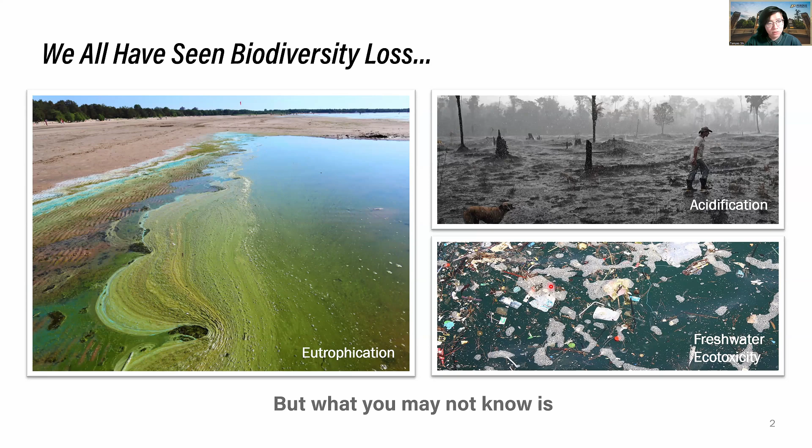Today, I'm going to talk about our most recent research on computing's biodiversity impact. So, first of all, we all have seen more or less the biodiversity loss, like these scary photos show the water bloom, acid rain, and loss of forest and aquatic trash. But what we may not know is that computing can actually be part of the reason for biodiversity loss.

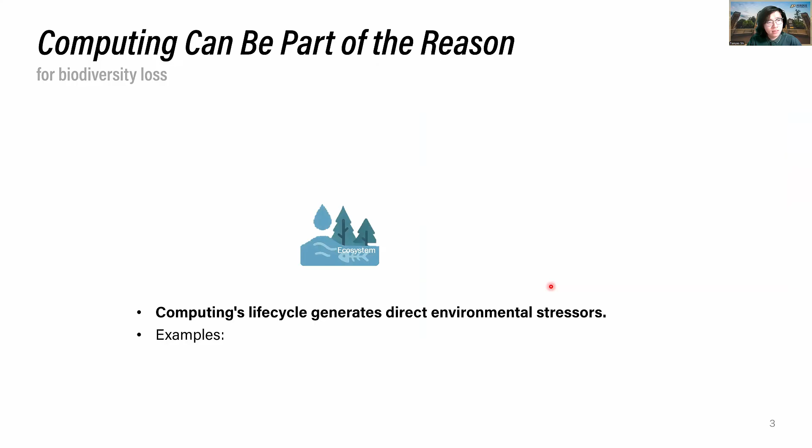Computing's life cycle actually generates direct environmental stressors in a lot of ways. For example, this is the ecosystem, and chip fabrication releases air and water pollutants, including acid gas and heavy metal ions.

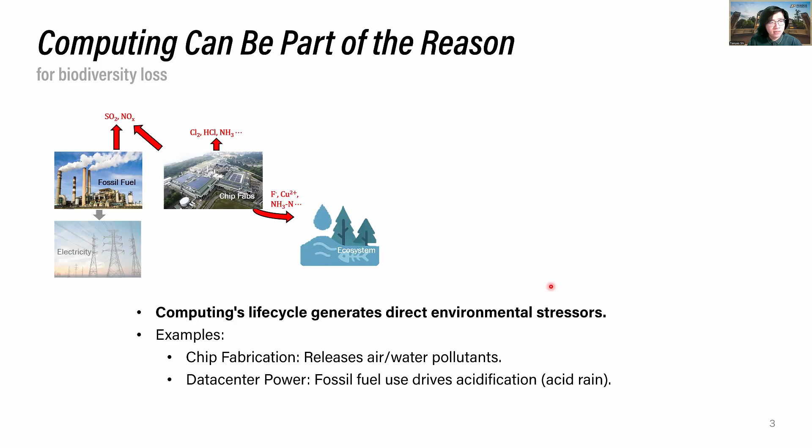Another path is the data center power, which uses fossil fuel generated electricity, and this indirectly drives the acidification process. Last but not least, when the electronic waste reaches its end of life, it goes into the leachate pond and leaches heavy metals into the ecosystem.

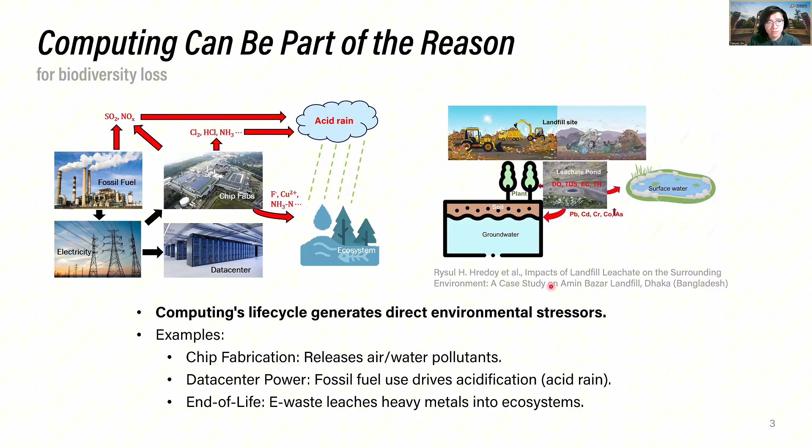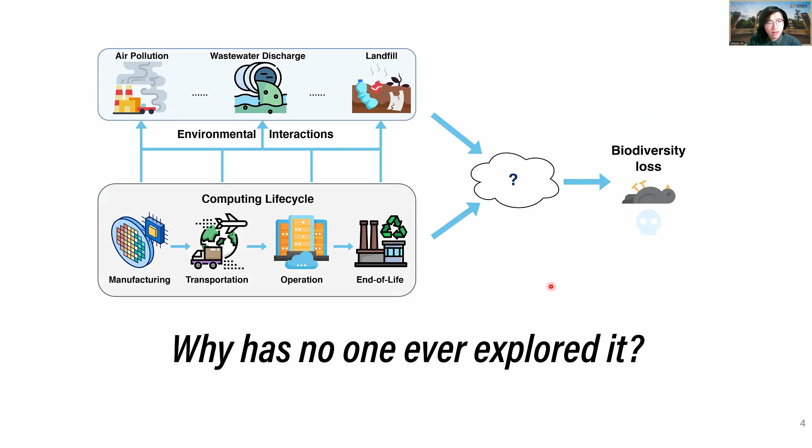So since computing has so much to do with biodiversity loss, and biodiversity loss is such a severe problem, why has no one explored it? The answer is that there exist two major research barriers. The first is the metric barrier, which means there is no quantifiable way to attribute the biodiversity loss to specific computing activities. The second is the modeling barrier, which means there is no modeling framework to connect the workload and system to a concrete impact number across the life cycle.

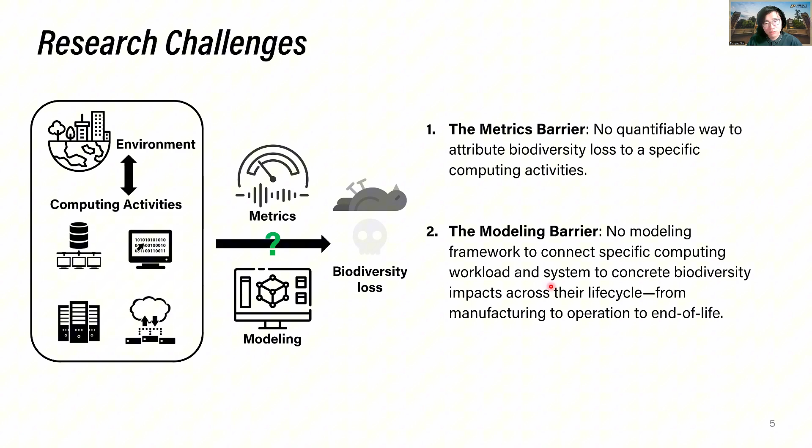To address these challenges, we conduct the first analysis of biodiversity impact in computing. In response to the metric barrier, we introduced two new metrics, EBI and OBI, to quantify the impact. In response to the modeling barrier, we present FABRIC, the first modeling framework that connects the life cycle impact to computing workloads. Finally, we use these tools to evaluate the impact across different devices, systems, workloads, and geographic deployment.

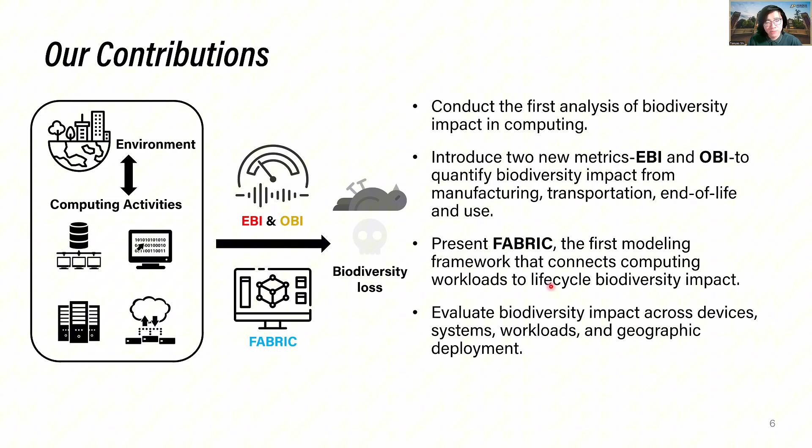This includes the acidification process, which means how much emitted gases can lower the environmental pH, and the eutrophication process, which means how excess nitrogen and phosphorus can enrich the ecosystems, and freshwater ecotoxicity, which quantifies the toxic impact of chemicals released into the freshwater ecosystems.

We select these three midpoints because sustainability reports from key vendors like TSMC and SK Hynix disclose the necessary emission data that directly map into these impacts. And to aggregate and unify these midpoint impacts, we use the ReCiPe 2016 model to convert midpoint impact into a single unified biodiversity metric expressed in species-year, which quantifies the expected fraction of species locally lost per year due to the cumulative environmental stressors.

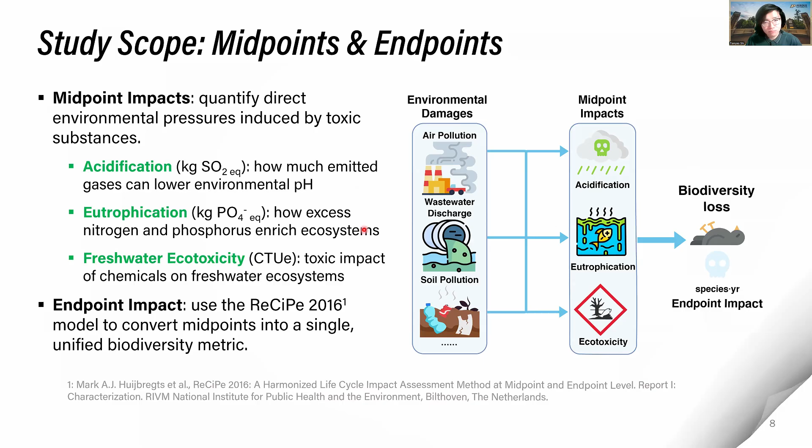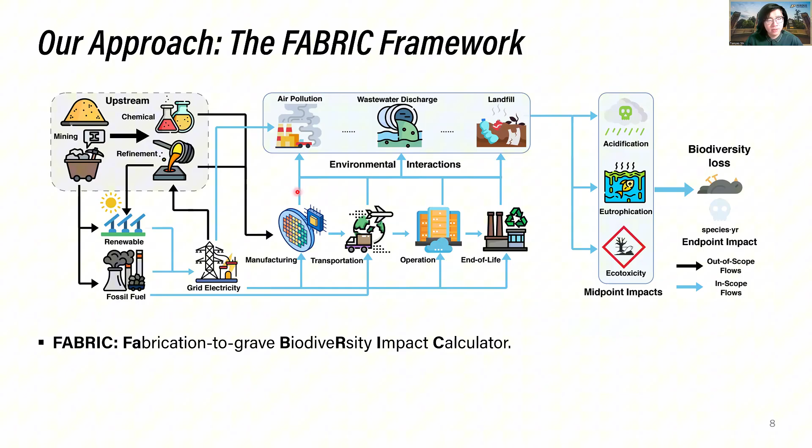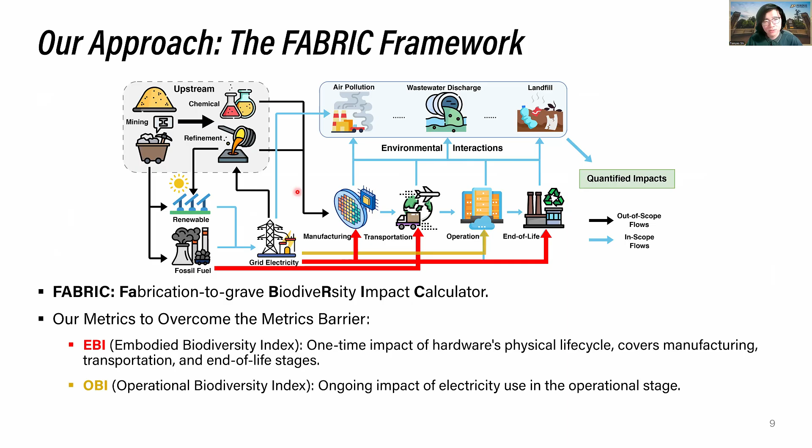So EBI is embodied biodiversity index, which quantifies the one-time impact of hardware's physical life cycle and covers manufacturing, transportation, and end-of-life stages. As for OBI, it is operational biodiversity index and it focuses on the ongoing impact of electricity use in the operational stage. Now, let's take a closer look into these two new metrics.

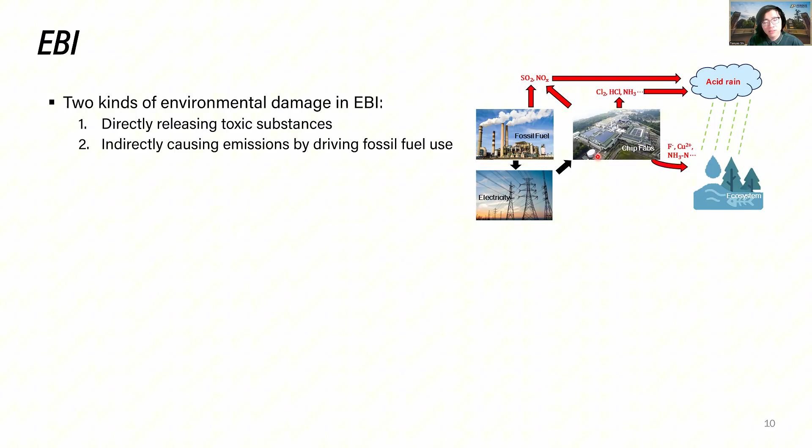So in EBI, we identify two kinds of different related environmental damage. The first is directly releasing toxic substances into the environment, like the chip fab releases acid gas and heavy metal ions. The second is indirectly causing emissions by driving fossil fuel use, which is the bottom part in this figure. The EBI of this device is calculated by summing all these impacts across different life cycle stages and impact categories.

And just like embodied carbon, the EBI of a specific workload is proportional to the execution time of this workload, amortized over the device lifetime and all the devices involved in this workload.

For example, take a look at a CPU. TSMC reports 39.5 tons of SO2 emission in 2021, and this translates into this much SO2 per production unit or per wafer mask layer. And this, in turn, based on the die size, the technology node, and yield of a specific CPU, translates into this amount of SO2 per EPYC 7743 produced.

And this is equivalent to this amount of acidification potential, and it does not incur any eutrophication or freshwater ecotoxicity impact. And using the midpoint to endpoint conversion framework, this corresponds to this amount of species-year loss. Although this may look minimal, when we repeat the process for other substances and aggregate the impact of all the CPUs made each year, or all the components in the system, this can actually be a non-negligible number. And more details can be found in the paper.

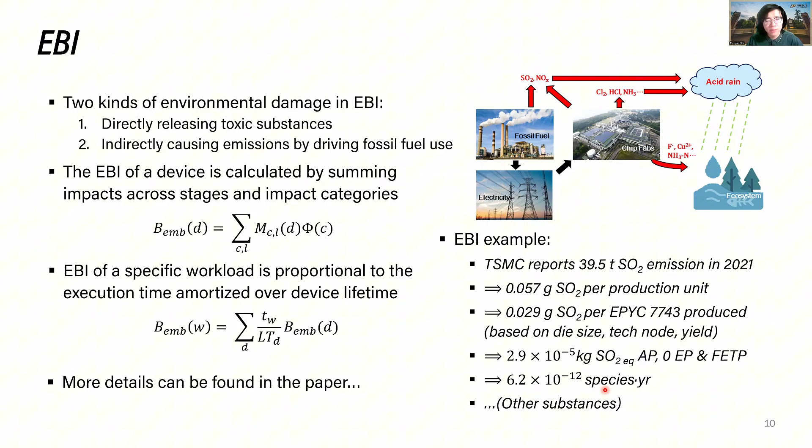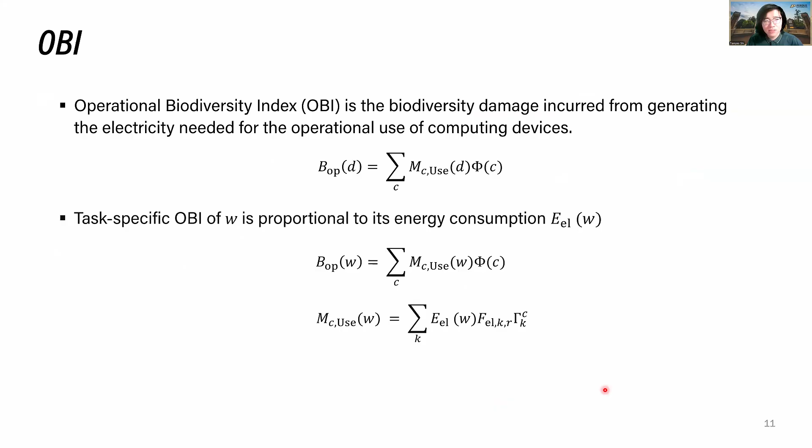As for OBI, it is rather simple. It counts the biodiversity damage incurred from generating the electricity needed for the operational use of computing devices. And just like operational carbon, the task-specific OBI of a workload is proportional to its energy consumption. And it also depends on the regional grid emission factor. That is, where it is deployed also matters.

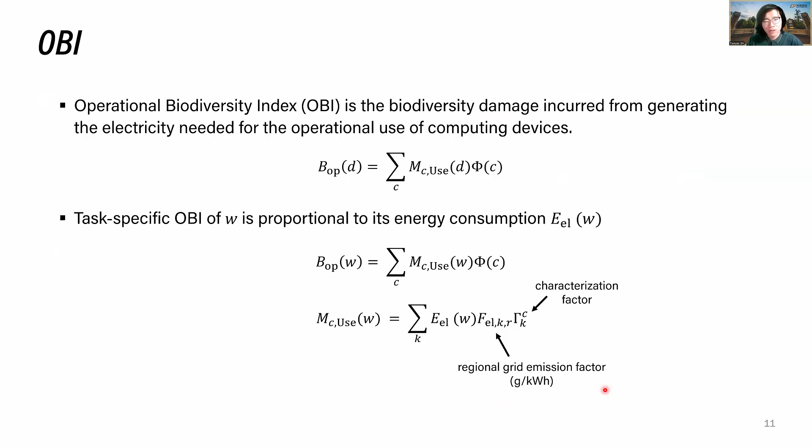So using these tools, we evaluate across different devices, systems, and workloads. We quantify the impact of 4 different CPUs, 5 different GPUs, and 3 types of different storage and memory devices.

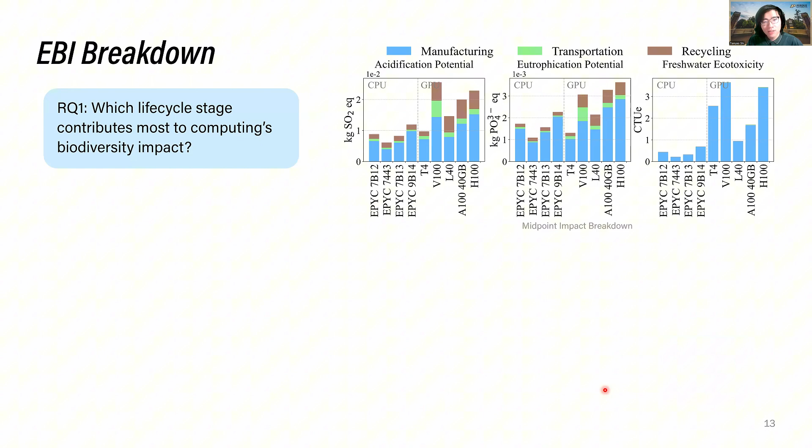So the first question is: which life cycle stage contributes most to computing's biodiversity impact? We first analyze the impact breakdown into different life cycle stages and different impact categories. So the upper figure is the midpoint impact breakdown, where the x-axis is different devices arranged by their time coming into the market, and the y-axis is the impact scale.

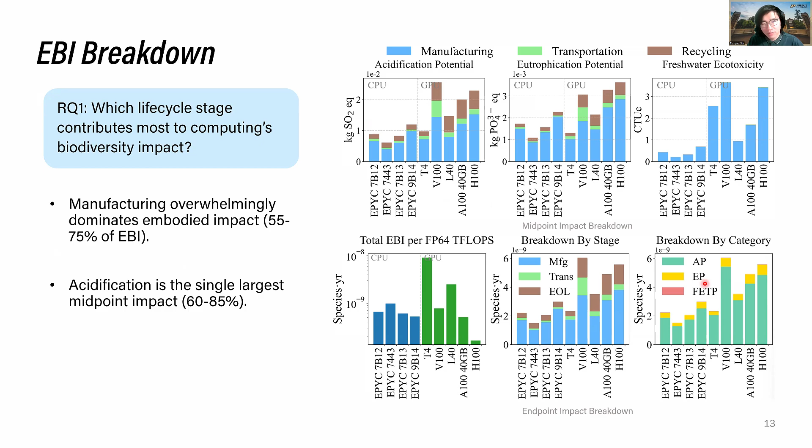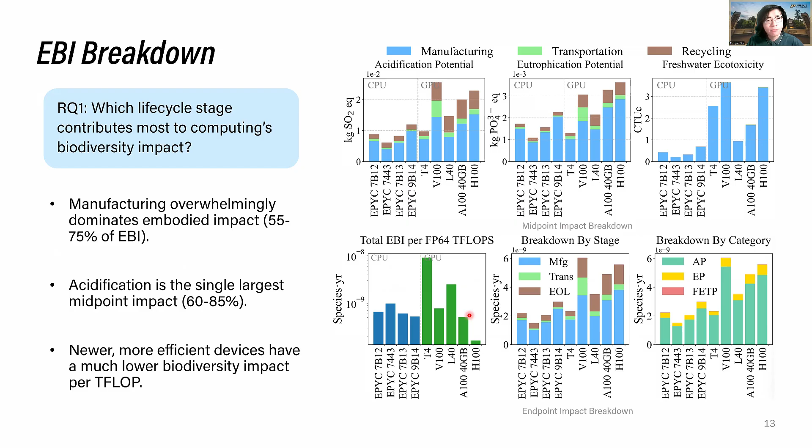So in these figures, the key information is, first, the manufacturing overwhelmingly dominates the embodied impact. Second, acidification is the single largest midpoint impact when we look by category. Last, although the absolute impact of these devices increases over time, when looking at a per TFLOP impact, the newer, more efficient devices have a much lower biodiversity impact on a performance basis. That was for the individual devices.

So the takeaway is when we are using conservative estimation, Fab-to-Grave in our study scope, and the US grid average emission factor, the operational electricity dominates the life cycle biodiversity impact. That was for the individual devices' impact per year. And when we look at the system level, it is roughly the same story. Take Perlmutter as the example.

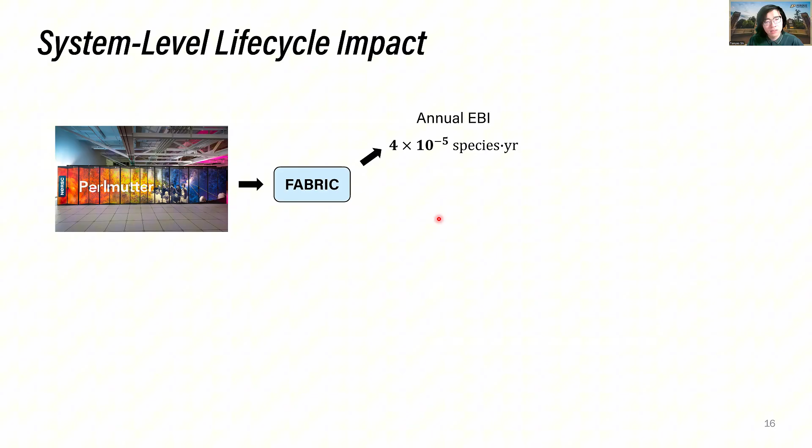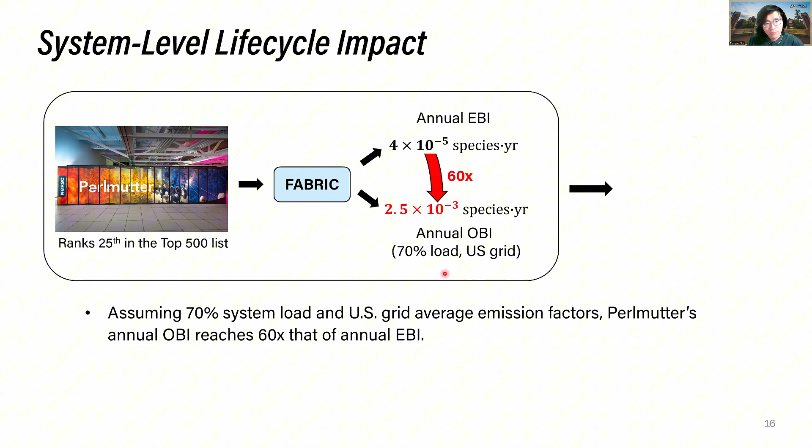From the previous calculation, we already know the annualized EBI of Perlmutter is roughly about this amount. And still, when we assume 70% load and US grid average emission factors, Perlmutter's annual OBI reaches almost 60 times that of annual EBI. And Perlmutter ranks 25th in the Top500 supercomputer list. If 400 Perlmutter-class systems are active globally, the total biodiversity impact is almost greater than one species a year, and this is non-negligible.

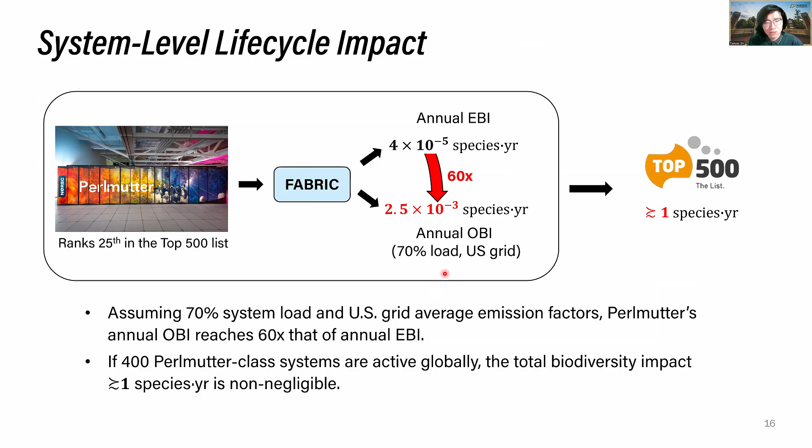For the last question, how does the deployment location affect computing's biodiversity impacts? We pick 4 different regions: the Midwest region in the United States, the California grid, Taiwan, and Quebec. They have very different regional energy mixes, where the Midwest and Taiwan are fossil fuel heavy, Quebec is hydro driven, and California also has a lot of renewables, including hydro and solar. And they also have different carbon and SO2 and NOx emission factors. And this in turn drives why they have very different biodiversity impact if we deploy Perlmutter in these different regions.

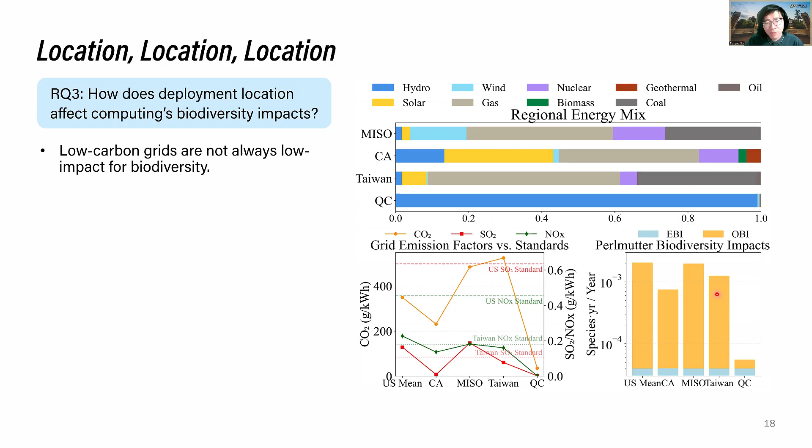So the conclusion is that low carbon grids like US grid average and MISO, although they have lower carbon emission factors than Taiwan, actually have higher biodiversity impact because the SO2 and NOx emission factors are higher in these two regions. And a hydro-based grid like Quebec can actually cut the operational impact by 2 orders of magnitude, to even smaller than the EBI, which highlights the necessity of investing in renewables.

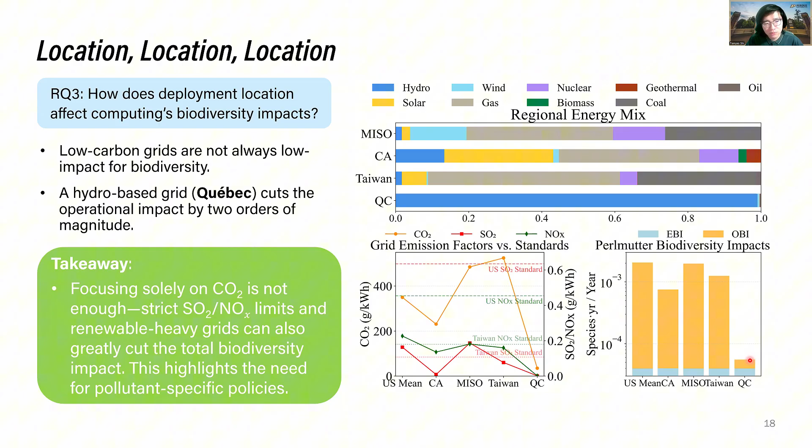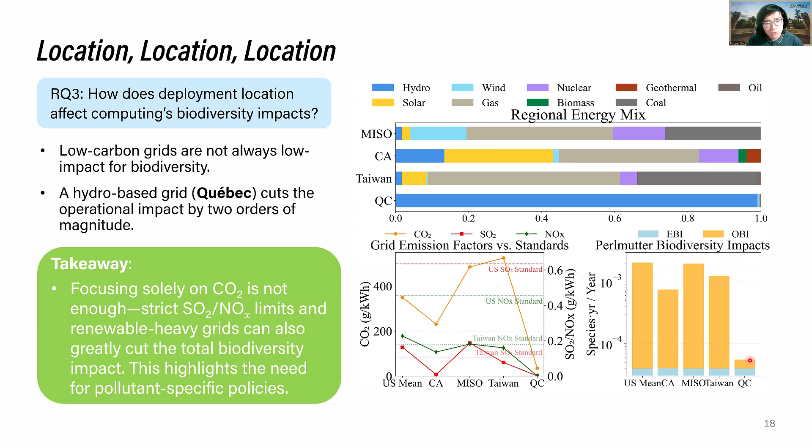So the takeaway is that focusing solely on CO2 is not enough to achieve sustainable computing. Strict SO2 and NOx limits and renewable-heavy grids can also greatly cut the total biodiversity impact. So this highlights the need for pollutant-specific policies.

To conclude, in this study, we first identify the research gap in the biodiversity loss induced by computing activities. Then we introduced FABRIC, EBI, and OBI to connect the workloads to the biodiversity loss numbers. And finally, there are some take-home messages. The first one is, by life cycle stages, manufacturing dominates EBI. And by the impact categories, acidification dominates EBI. And for the life cycle analysis, when assuming the conservative Fab-to-Grave scope and US grid average emission factors, OBI dominates the life cycle impact. Finally, strict emission standards and renewable-heavy grids are two promising paths for us to achieve more sustainable computing.